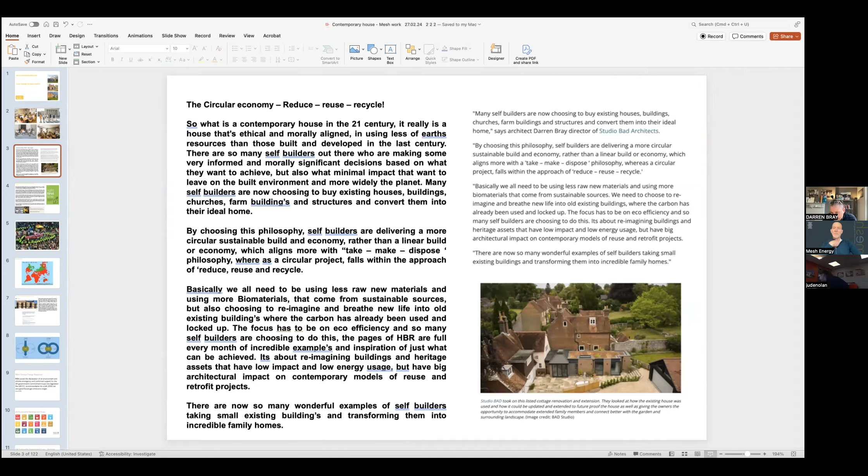And so the article that we wrote for Home Building at the end of... Sorry, Darren, can I just interrupt for 1 second? Do you reckon you could put it on slideshow just underneath, yes sorry, then it'll make it easier for people to see. Marvelous, okay, thanks Darren. Sorry to interrupt. That's all right.

This little article that we wrote for Home Building last year was all about what is a contemporary house in the 21st century. For us, it's that kind of ethical and moral question: how do you align with using less of Earth's resources in the developed world? We talked about the idea that so many self-builders out there are making informed, morally significant decisions based on what they want to achieve.

I was just chatting to Simon about that. Given that so many of the feed-in tariffs and the push for renewables has been removed by government, we feel that private domestic clients are the people really driving the opportunity to continue developing not only really interesting pieces of architecture, but using less materials and sustainable sources. So I think there's still a fantastic opportunity for all of us to be doing some great work.

So we wrote the foreword to Mesh's book, I think probably maybe 4 years ago now. And I think Doug was really quite passionate about writing this little practical guide.

Again, we are academics and teachers, so we take part in teaching at various universities. I teach at Reading University, and we talk a lot about activism with our students. And this young lady, Greta, has been an incredible activist, kind of pushing the idea of how we need to be using less, but still doing what we need to do to bring about interesting opportunities for ourselves.

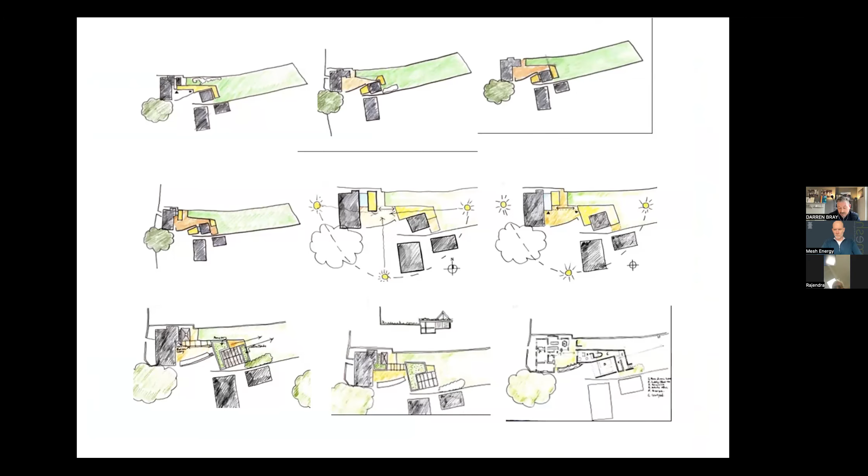This is the rear garden, and they were asking us to look at how we might incorporate an annex and extend their dining space. You can see quite a constrained site, but also very historical. So with every project we look at a whole series of options, and for us it was about looking at sun paths, and how we might reconfigure the garage, then presenting those as a series of options.

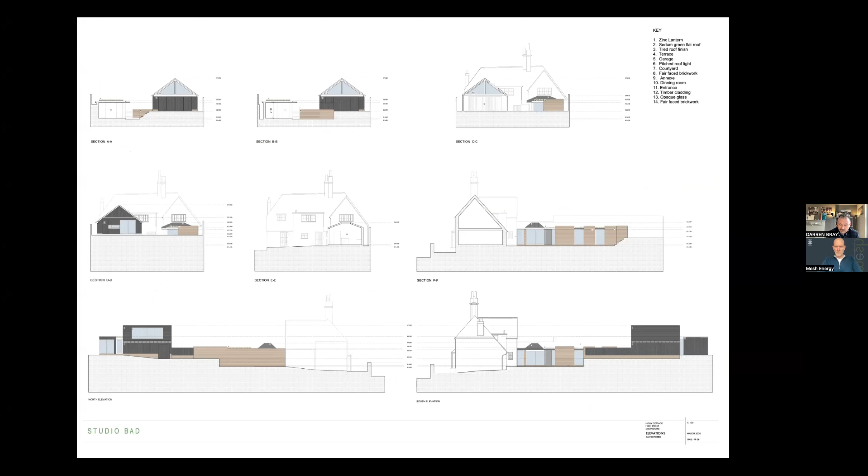So here we've got the existing listed house, and we were pushed by the conservation officer to go quite contemporary with this. We'd already proposed something quite contemporary, and came up with this response, which was a contemporary extension for an annex with a zinc roof, but also building on the local context with the brickwork. We built lots of models and presented that to the local authority, then came up with these visuals, as the conservation officer pushed us to go even more contemporary.

Then it was looking at the existing house and borrowing from that in terms of the brickwork and the detailing. The response was a small little pavilion, which was the joining piece between the old and the new, and then how that sits within the context without damaging it.

This is the family here, and you can see it's quite a tight site, and it was incredibly challenging with some of the neighbours here. But we hope that we've set something that sits reasonably comfortably within the context of Meonstoke.

And then from that we moved on to working with another family who just bought an old farm, a Victorian farm based near Reading, which was a collaboration with John Barclay, a local architect. John's sister bought this property, and we collaborated with John on this.

So again, a very tired existing building, which we've done a complete retrofit on, where we've replaced all the windows, upgraded all the wall insulation, and took the roof off. It's got a ground source heat pump. You can see some really lovely features, and it's got triple glazed windows in now.

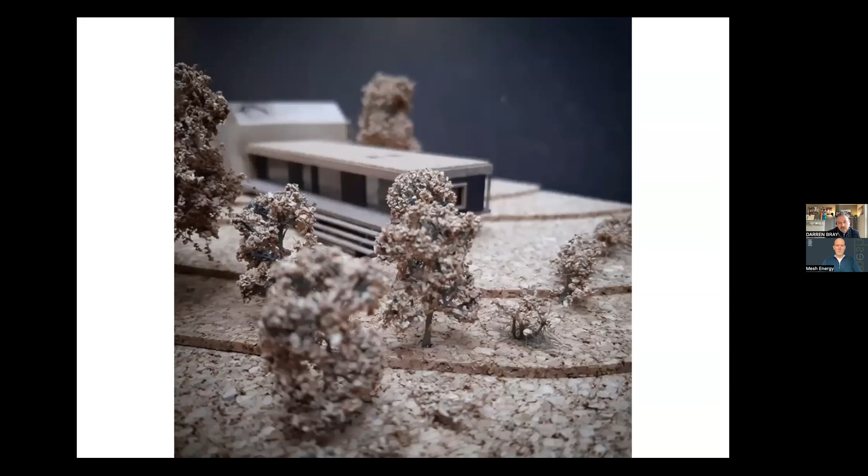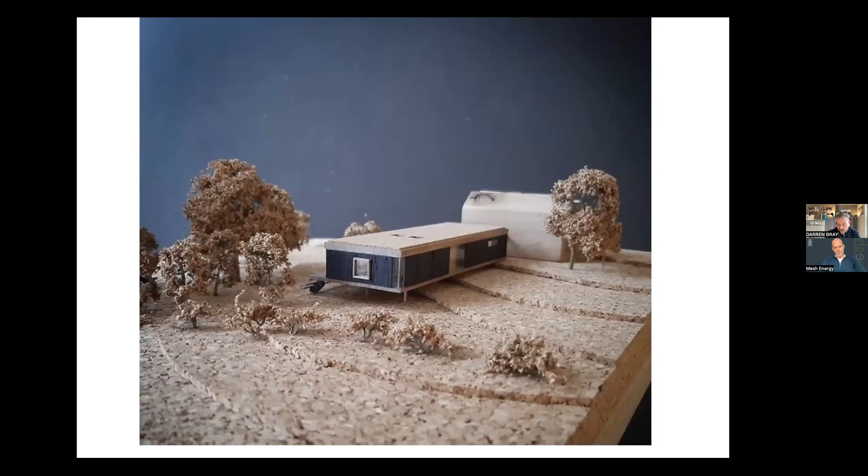This was the existing building we were met with about 4 years ago. The initial idea was we designed a single story response, and we were about to put this in for planning, but the client decided they wanted a 2-story response instead. So we withdrew the application, and worked with John, collaborating on producing this as a 2-story proposal: a timber frame extension to the existing. You can see we've used Internorm triple glazed windows in both the existing and the new build element.

So this as a response is quite something, because with the ground source heat pump and the upgrade in the thermal fabric, there's a huge amount less load on this than there would be normally.

Darren, can I just interrupt again? Tobias is asking a question about this, well, the previous project, in terms of how did you do the upgrade of the wall insulation?

On this one, this effectively was internal insulation. So rather than do anything with the cavities, we've done a complete insulation upgrade internally, and that wraps into the triple glazed Internorm windows, so there's a complete joined adjacency between windows and internal walls—there's no point putting triple glazed windows in if the insulation is within the cavity. It's all aligned with the roof insulation and floor insulation, so effectively we've done a kind of blanket within that internal environment.

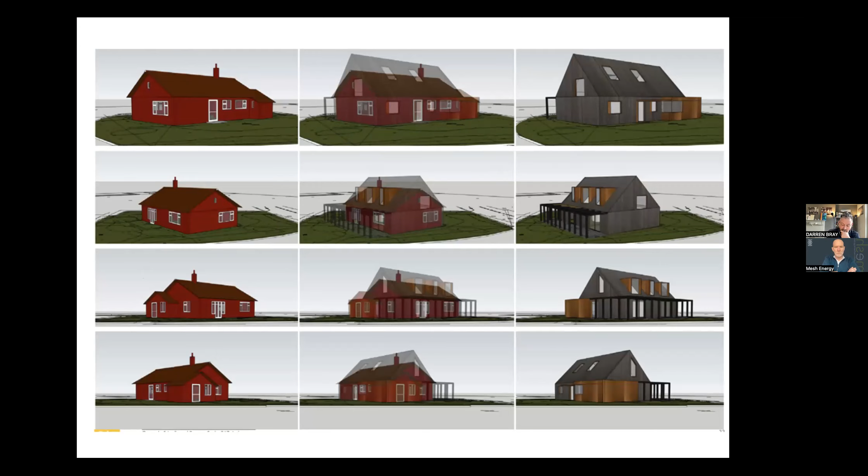You'll see this is the existing property where we modeled what we had, and then it was a case of looking at how we might take the roof off, put a new roof on, but also get rooms in the roof through dormers. So we had to look very carefully at how we might configure dormers in this building.

So we went through a whole process of looking at the existing ground floor footprint—you'll see those were the extensions—and designing external colonnades to cut down on sun. There we're showing the roof extension as to what we were increasing on the height, and then the dormers. All the dormers are then angled so that they turn away from the neighbours.

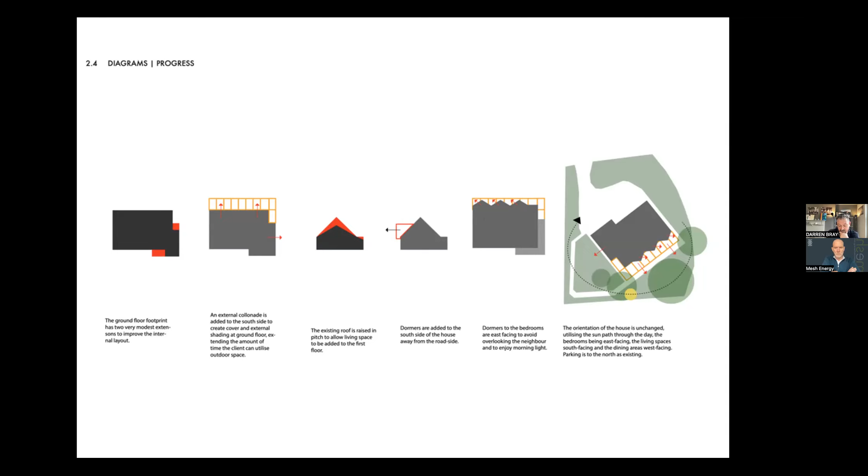At the same time, this was again doing a complete thermal upgrade and trying to create something of architectural merit that the planners would buy into. So effectively we reconfigured the ground floor and put a new roof on to get bedrooms in the roof—here are the dormers that are cut into the new roof.

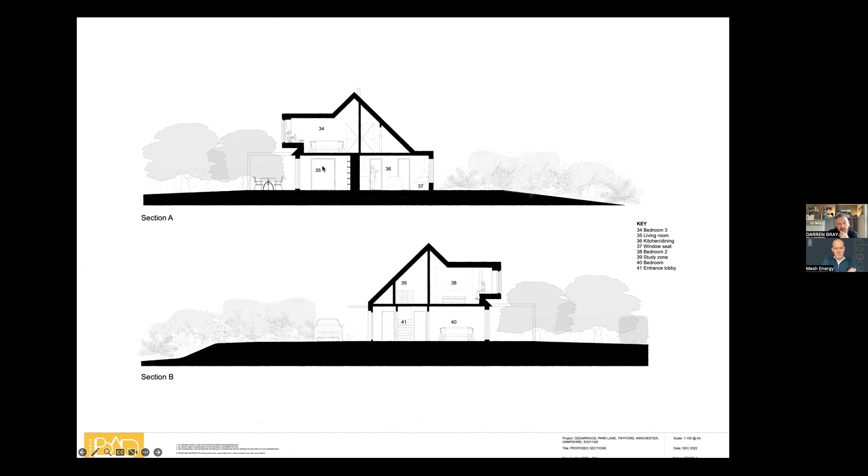The idea was to completely reclad the outside of this building, keeping the existing timber frame, upgrading all of the existing insulation in the walls—we added mineral wool to the walls. We also upgraded the floor, put a new roof on, and there were air source heat pumps that we got planning for as well.

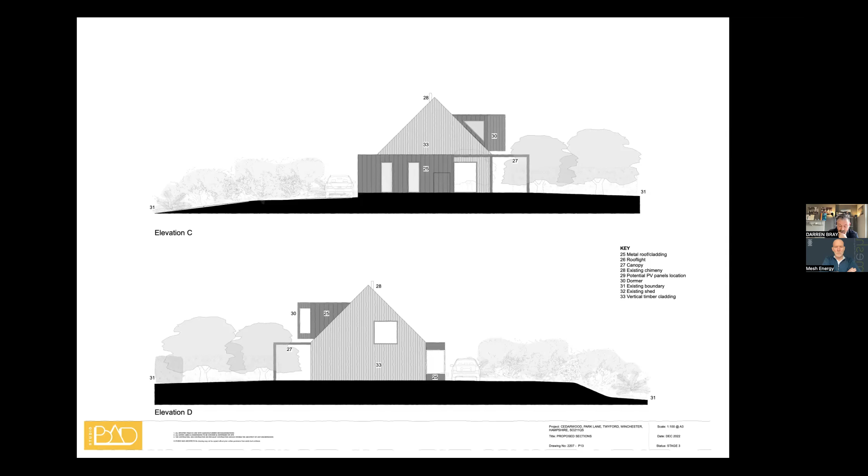When you say—did you say plural, air source heat pumps?

So we've got planning for two. We've put one in, and at the moment I'm not quite sure what the feedback is, because the clients have moved to Madrid and they're renting this house for the time being, so it'll be interesting to find out how it's performing.

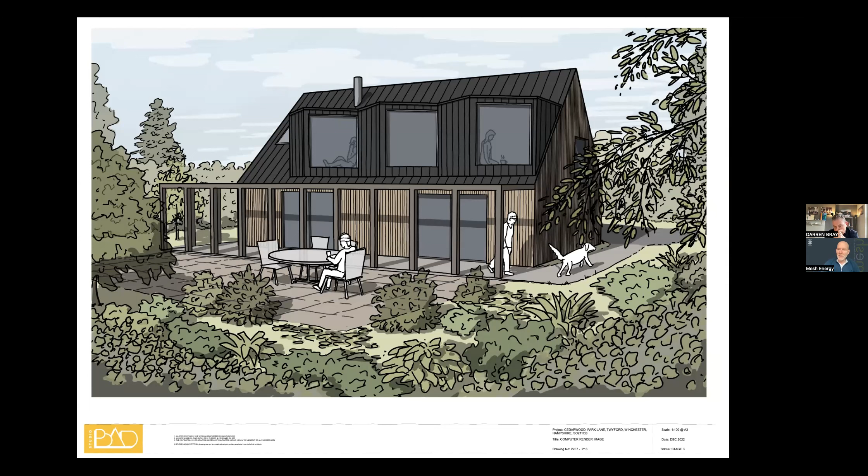Is there any post-occupancy evaluation ability with this one? It'll be interesting to ask the question. I think the greatest challenge for architects is doing projects like this, and then asking clients to buy into that, whether we've got a fee to do it or not, but still have to monitor it. It's a real challenge for us as architects at the moment to get that feedback, but it's incredibly important.

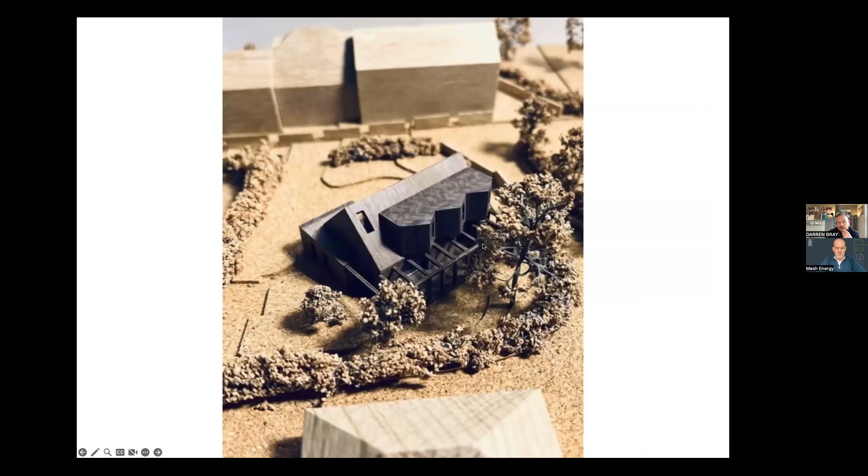Quite different to what it looked like before? Very different to what it looked like before, yeah.

This is a project that we have on site at the moment, and this is something that we've been working with Mesh on for probably about the last 18 months to 2 years.

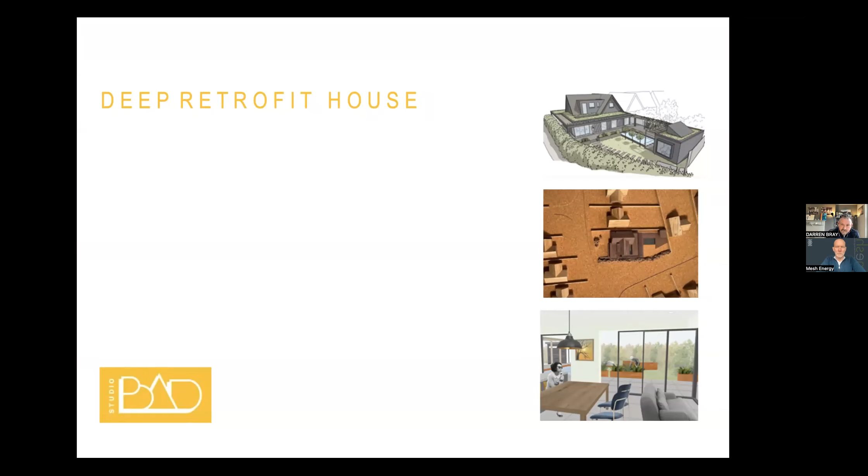This is a house in Brockenhurst, where the clients bought this about 2 years ago, and it had these interesting little appendages at the back that had been added over a number of years. The client's challenge to us was that they wanted a complete thermal upgrade of the existing property, but they wanted an extension that engaged with the garden, because they wanted a new kitchen - they're very passionate about their cooking and entertaining.

So we went through a process of looking at how we might thermally upgrade this building, and Mesh have been fantastic in doing their own feasibility work, which has been incredibly important to feed back to the client.

As an example, this is some of the work that Mesh have been undertaking - looking at the existing roof and how that sits with the new roof, existing walls with the new walls, and looking at all the options. What's fantastic about this is that it looks at what the cost of the materials are, what the cost of fuel is, and you can see there's a column that looks at the payback.

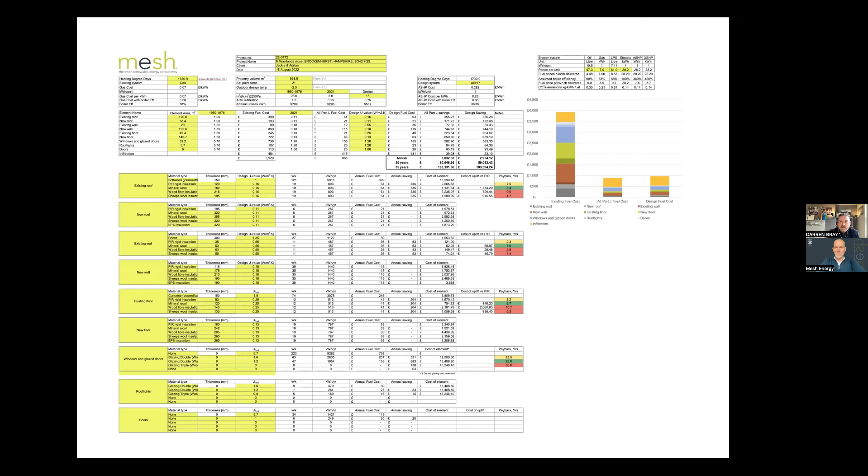Not only that, Mesh suggested that we did a permeability test before we actually started construction of this. So it's the first time that we've undertaken a test on an existing building before doing any work, and that's been great to feed into what we're doing as a team.

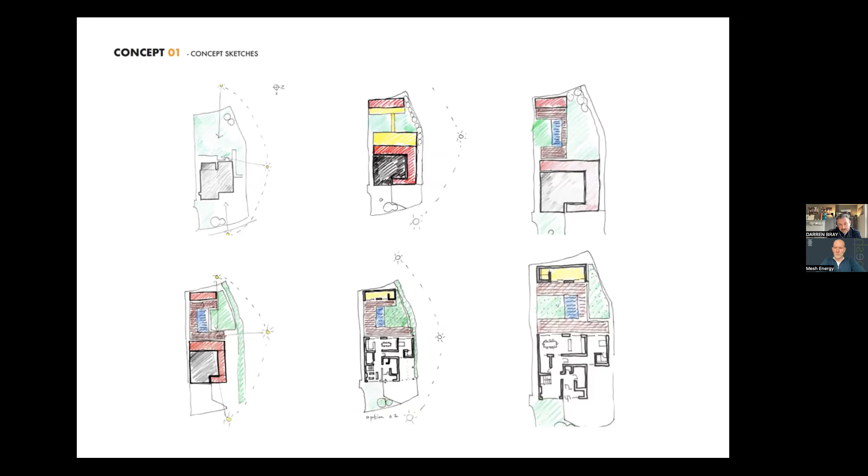So for example, we did a feasibility study in line with Mesh as we were looking at design options and looking at the extension. So this is the existing house, and then we've looked at options to extend at the back with a new kitchen, dining, living space.

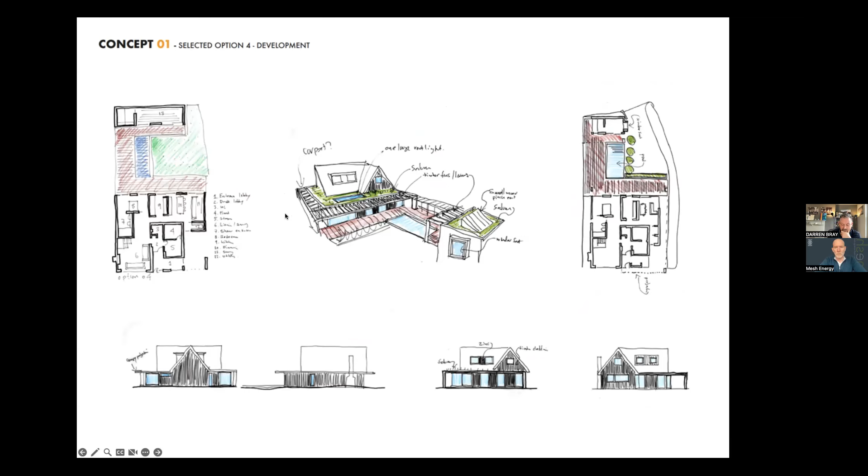Lots of ideas about how we might build in shading once the extension's in place, but also looking at how we might upgrade the existing building. We did a lot of SketchUp modeling to look at overheating and how we might negate that. So you'll see here, this is the proposal for the extension, and then we've got these sunshades at the back.

We're also looking at recladding and insulating the existing building, putting in triple glazed windows in the existing building, just like the Victorian farmhouse. So really this is the key extension, which is creating this relationship to the garden.

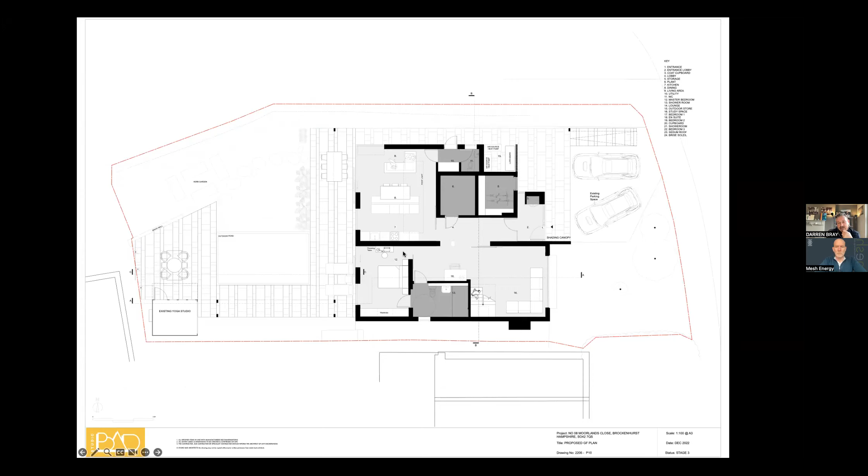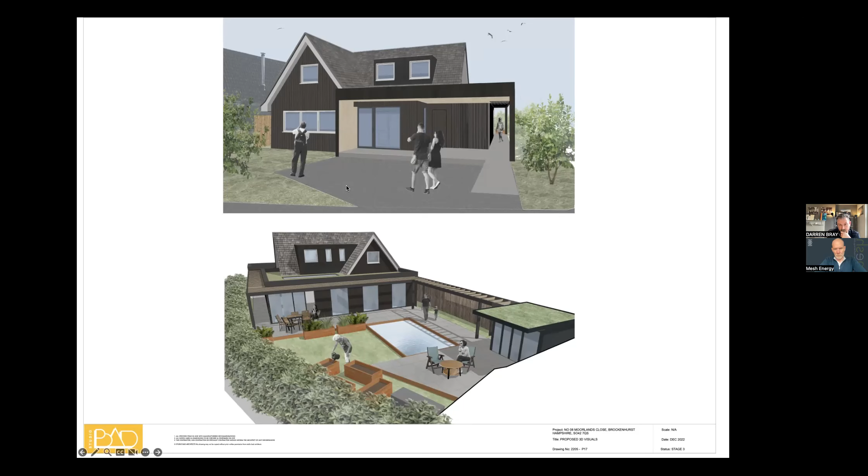This is the rear space where we've got our little extension, tying into some of the things the client wants to do in the rear. We've got a new entrance canopy as well that ties everything together. Again, we're building lots of models to convince the local parish council, which is always a bit of a challenge.

This one was an easy one. It was the first time the parish council had ever seen an architectural model brought to a meeting, which got unanimous voting on our side.

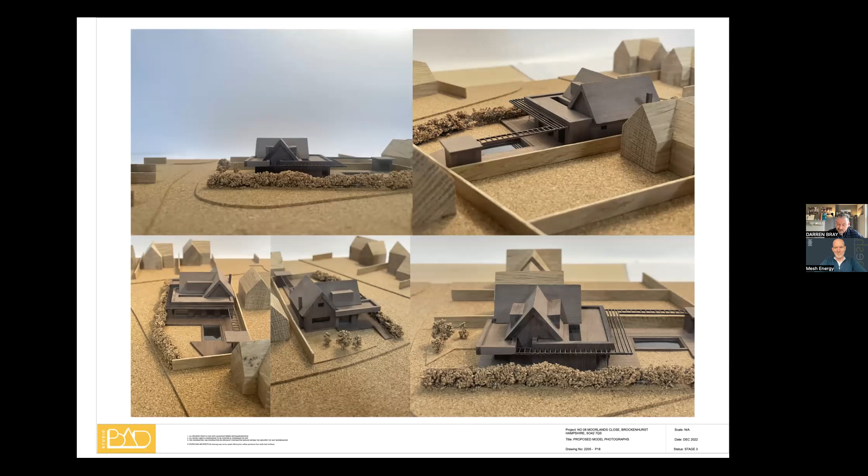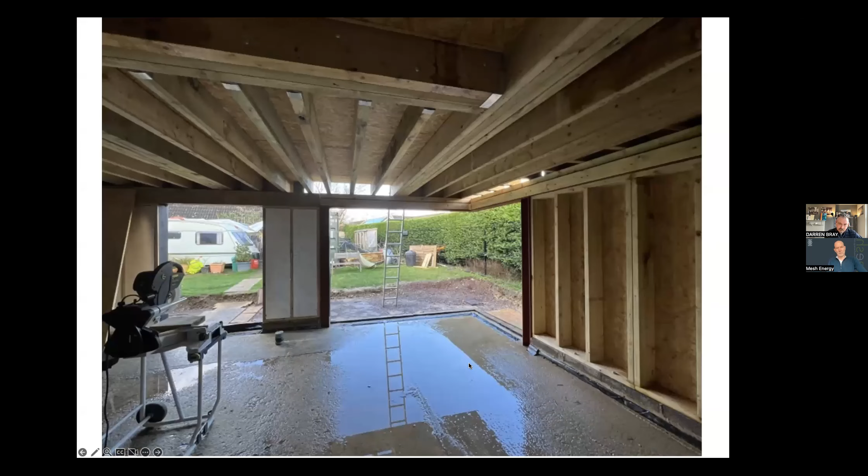So this is us currently on site, and this image is from the front door. It was all about looking through the existing house to get these views of the garden. This image is from the dining space, again looking all the way through into the new living kitchen dining space. And this is the key view out.

So again, we're using Internorm windows. That's Paul the builder from Task, a local builder based in Christchurch, who's doing a fantastic job on site.

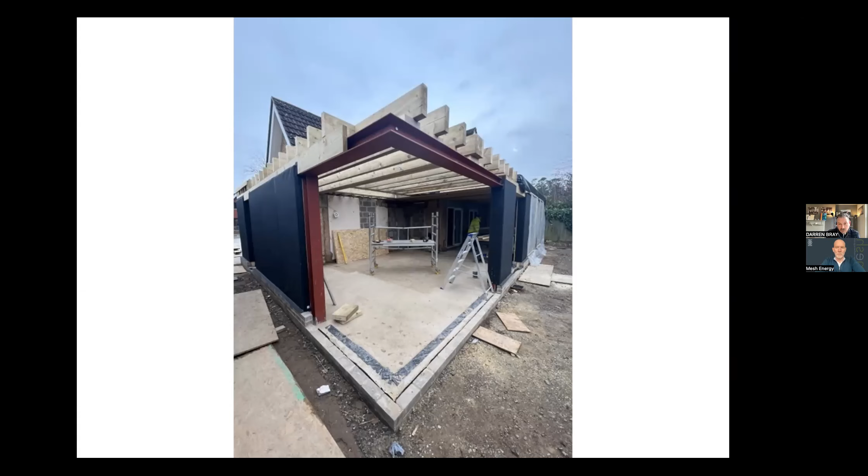Do you help find the builders, or is that down to the client? Yes, we've had to, because it's become more and more challenging with tender and build costs, and we negotiated with Paul on this. There are certain things Paul's doing and certain things the client's doing. It's the only way we can deliver these projects at the moment.

So this is the extension from the back, and we're going to be overcladding all of the existing cladding, upgrading the insulation. So again, we've got Internorm windows going into the project.

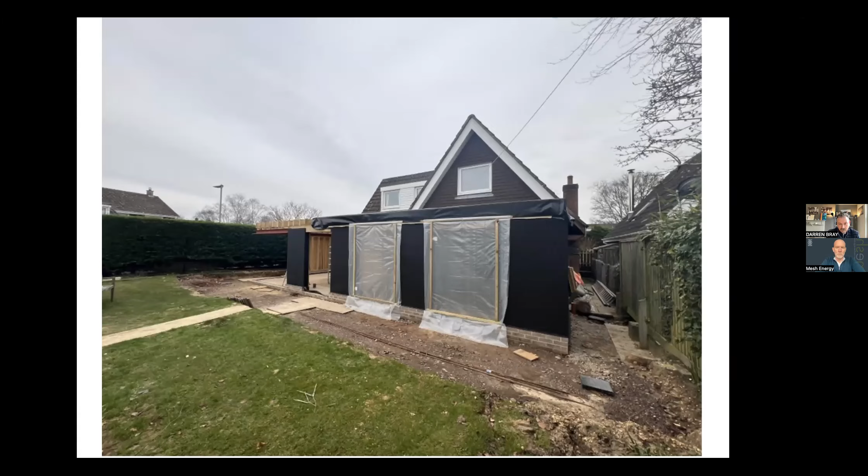Just on that, I didn't ask you to come on and plug Mesh, but it's great that you've mentioned us. When it comes to the work Mesh did with you, obviously the clients have certain ideas of how they want to use the house, the connection to the garden, etc. When it comes to the thermal upgrade work, the insulation and cladding, and addressing overheating, and even getting the client to pay for the feasibility study, was that something they were already interested in, or was that you leading the conversation?

I think they brought that question to the first meeting they had with us. They came through the RIBA. It's always interesting when a client comes through the RIBA client advisory service, because they've clearly done their research and gone to the RIBA saying we need to find an architect. So generally those clients are coming with quite a lot of knowledge themselves, having done a lot of research, and they may well have been to some of the trade shows out there.

So it was a question they asked us at the first meeting - how do we go about looking at a strategy for the whole project? And we said, well, ideally we go and appoint Mesh to do a feasibility study alongside us.

What was great was that you guys were doing your work while we were doing the design work. So it wasn't that unfortunate situation where we've done a load of work, maybe even gone in for planning, and then come to you asking how do we look at some of these things. It was pretty much at the same time we were starting our work, so it was great to feed in, and the fact that we did the air test at the same time on the existing structure meant we knew what we were doing. It just dovetailed really quite well.

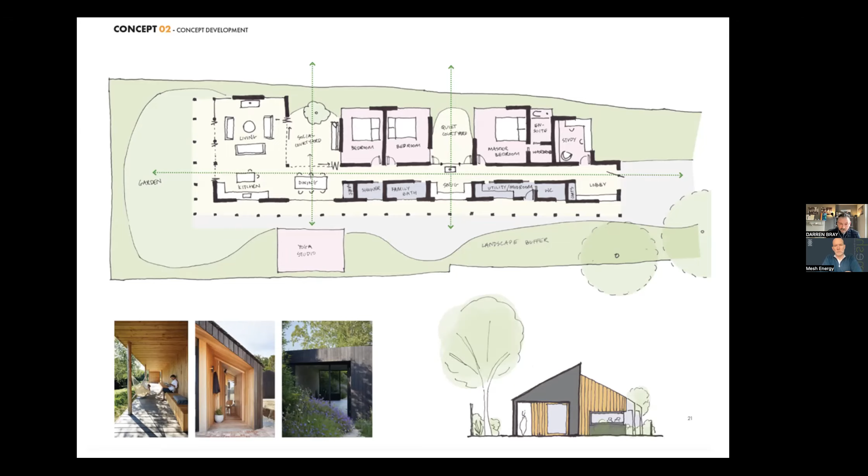So we've taken the existing context and designed a house that works in the existing skinny plot, but has a series of mini courtyards, so that those courtyards spill out and bring the natural landscape into the house. It gives us an opportunity to open out onto those courtyards and use them for natural shading and ventilation.

Again, we did lots of SketchUp modeling to look at what the options were on this site, and then we produced a whole series of illustrations.

So in reality, what we're trying to do is remove the existing building that's past its sell-by date and produce something very similar. The idea is that we're cladding the roof and the walls in all the same timber cladding, and these little courtyards form breakout spaces between living, dining, kitchen and bedrooms.

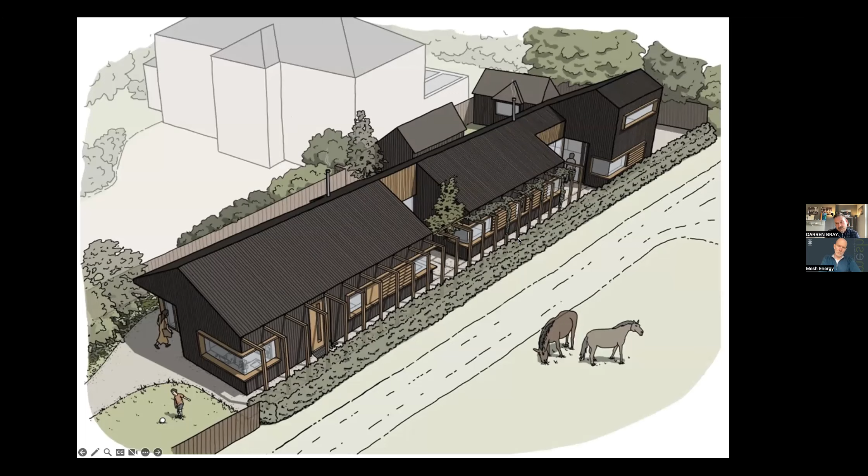It's been really quite challenging through planning. In fact, we haven't quite got there yet. We're about to go to planning committee in about 4 weeks' time. We've got major backing from the planning officer and conservation officer, but everybody else in the vicinity has been quite challenging. But that's the nature of the project, really.

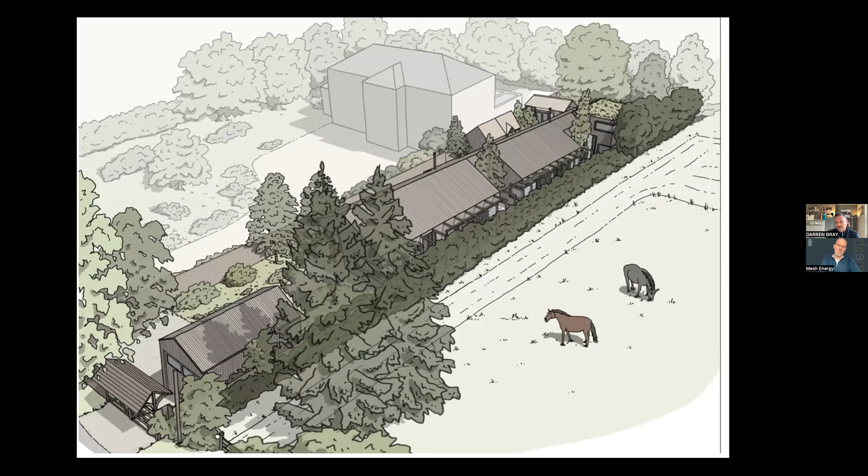So you can see the context - that's how our building sits on this long skinny plot, with the existing properties around. Quite interesting, because what we've been doing is trying to sell the idea that this is very contextual. We've built lots of concept models just to show the client. The idea is that it's drawing from the natural agricultural aesthetic, which the planners and conservation officer have bought into.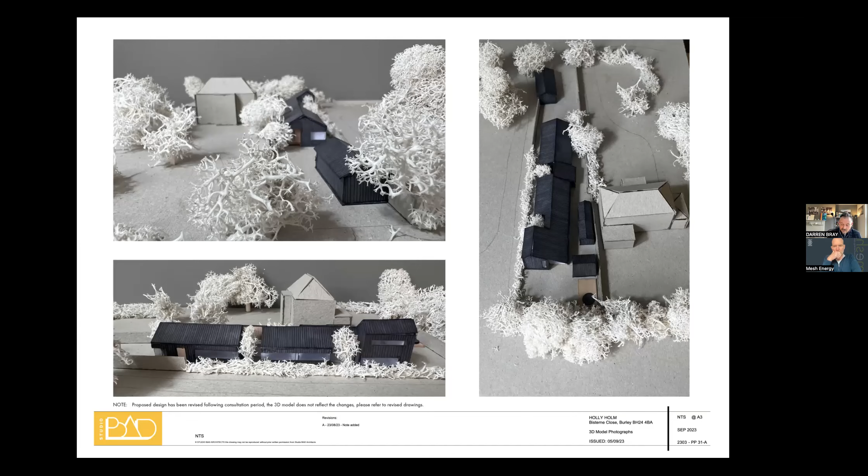But as far as some of the neighbours, they expect this to look very domestic and very traditional - they're fearful that it's going to look that way. Whereas our view is this is what we'd typically describe as contemporary vernacular - drawing from the vernacular, but with a contemporary twist to it.

We've been working with a cross-laminated timber company, even at planning stage, to develop a system where it'll be cross-lam walls, cross-lam floor and roof. The idea is that it will float on screw piles. Again, it's heavily constrained in terms of trees and planting, so the idea is there won't be any trench concrete foundations, there won't be any concrete slab - it'll be a structure that sits above the landscape.

Darren, do you mind if I just bring John in? He's got a question. John, did you want to come off mute? Right, anyways, can you hear me?

Yeah, very good. My question really, Dan, is do you have any costings of these upgrades? As it would seem that such upgrading would almost be the same cost as the new build, especially with the VAT advantage, where you don't pay the VAT.

So we have these conversations, which I'm sure everybody on this call has with their clients, about VAT and upgrades. For example, the project near Reading, the Victorian farmhouse - the client had done their research, so they deliberately bought that property knowing it had been empty for a period of time. If a property is empty for 2 or 3 years, then providing you have proof with the local authority in terms of whether anybody's paid any council tax or not, you can rate the VAT down to 5%.

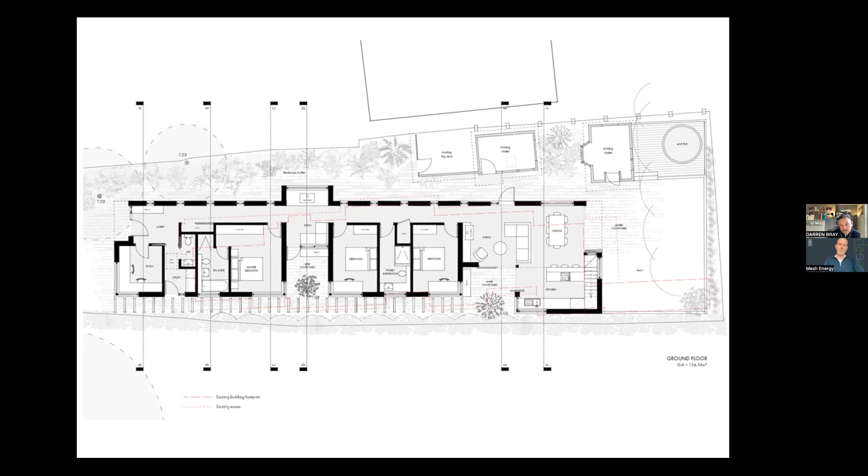On this one, we don't have a current sort of costed budget. We've gone out and got an approximate cost on the cross-laminated timber. This is about the third or fourth iteration in terms of planning, which we're hoping we'll get approval on in the next month.

The other last quick project I was going to briefly talk about is a project that we're just about to put in for planning. Again, it sort of sits comfortably with our philosophy about reuse and reimagining. This is an old pottery in the centre of Whitchurch, where a client has approached us to attempt to get planning for a new house right in the centre of Whitchurch. But again, for us, it's really important to reuse, reimagine, and try and draw from what's already here.

So you'll see the current aesthetic. This is the external wall that greets you, which has got a beautiful mix of flint and brickwork, and even sort of cut-ins for where Penny used her studio here to get light into her pottery studio. What we've been doing is trying to draw from that into what we propose.

We had a design review on Friday here in the studio, and we had somebody from the National Trust, who's a surveyor, as part of our design review panel. He talked about a phrase called bungaroosh, which is apparently a real term for this type of construction, which is kind of added, and it's a sort of natural aesthetic that appears in certain parts of the South Downs National Park. That was all new to us, but it's interesting because what we're trying to do is draw from what's here.

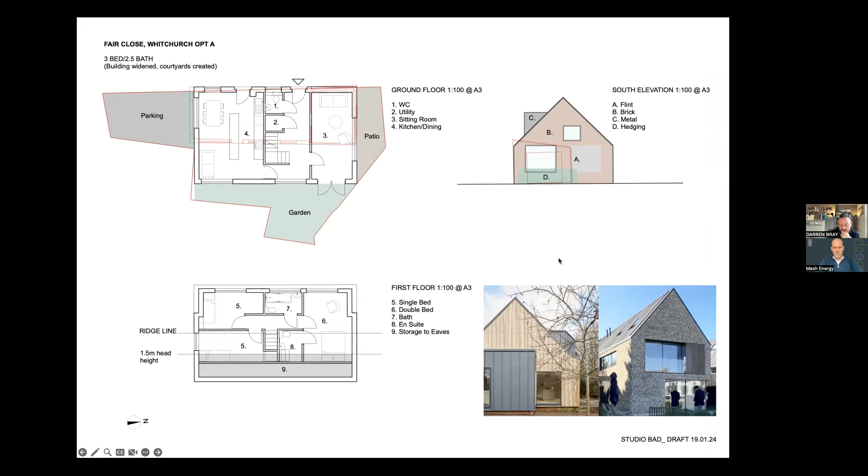So what we've been looking at is replacing the pottery studio with a new home. Examples of things we've done previously, but also really good contemporary examples of how you might produce something which is of a traditional form. And that idea of taking something that might be a ruin and then adding something to it. So it's how you can use what's there to your advantage and then propose something that's much more contemporary.

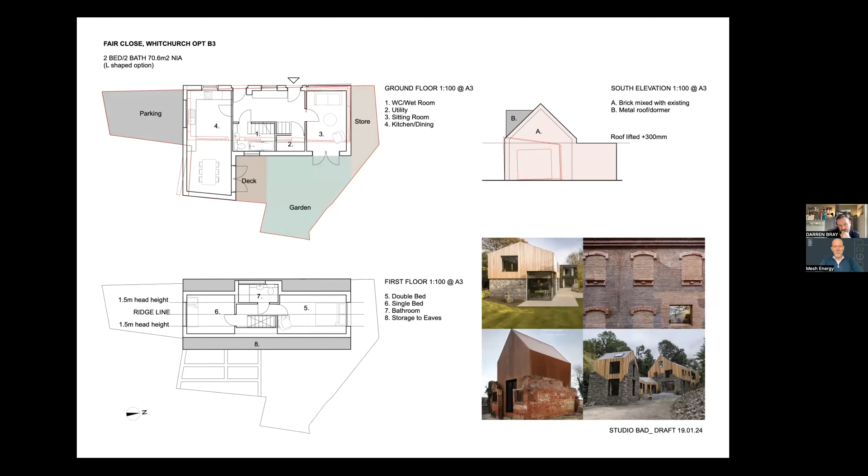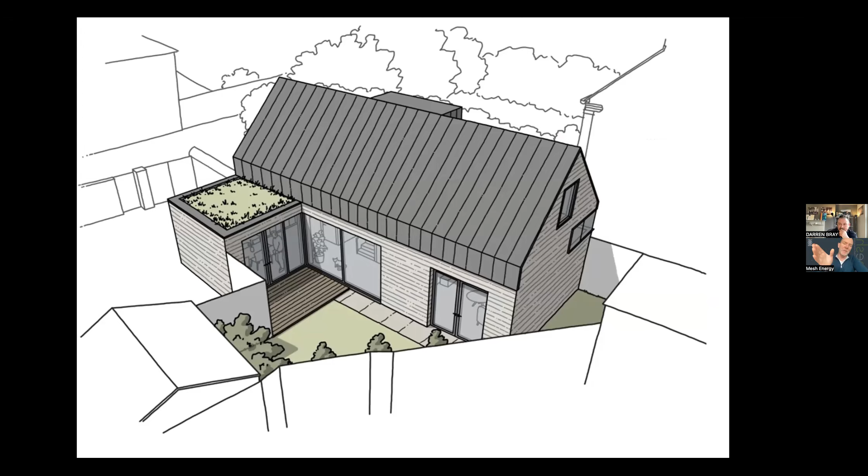What was good last week is when David was speaking, he was talking about how he was using leftover materials to put in nesting areas for birds and insects - little insect houses, it was quite cool, just trying to use as much leftover material as possible within the design. It was cool.

And that's exactly what we're trying to do here. So from that photograph I showed at the start, where you've got the existing brickwork and the openings, that's effectively what we're trying to do - take what's there and add in your contemporary addition, but produce something that is thermally aligned with current building regs. And I guess that's really our passion - whether it's a house or a church, it's that same aesthetic.

So I think that's my last slide. It's a bit of a quick run through, because I know you talked about 30 to 35 minutes. We've had questions on the hoof as well, hopefully you're okay with that. I didn't ask you whether you wanted to take questions during or after, so apologies for that.

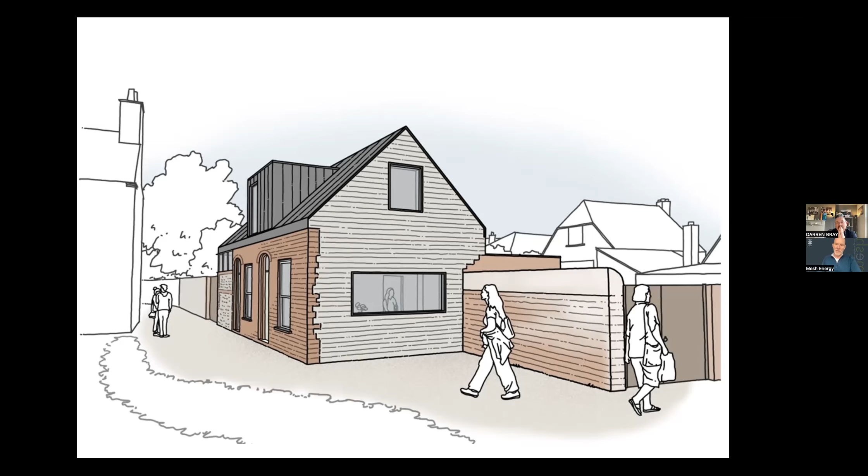It's good to see the different types of contemporary houses that we can all live in and can look to design as well - it's a really interesting presentation. Thank you, and also they weren't all grand design houses, they're all very attainable. The farmhouse with the extra building on the side - people will be fortunate and lucky to live in a house like that. But it's good to see the different breadth, and the skinny site, as you called it.

In fact, not that it's about me, but I found a plot in a village close to Exeter, and it was very, very similar to that plot. My wife said, I cannot live in such a thin plot as that. It was interesting to see how you met that challenge.

So I'm just seeing what Jill was writing - were some of the properties built to passive house standards, or did you include elements of PH, like triple glazing etc.? None of them are built to passive house standards. It's always a bit of a challenge to do that on existing buildings, but not totally impossible.

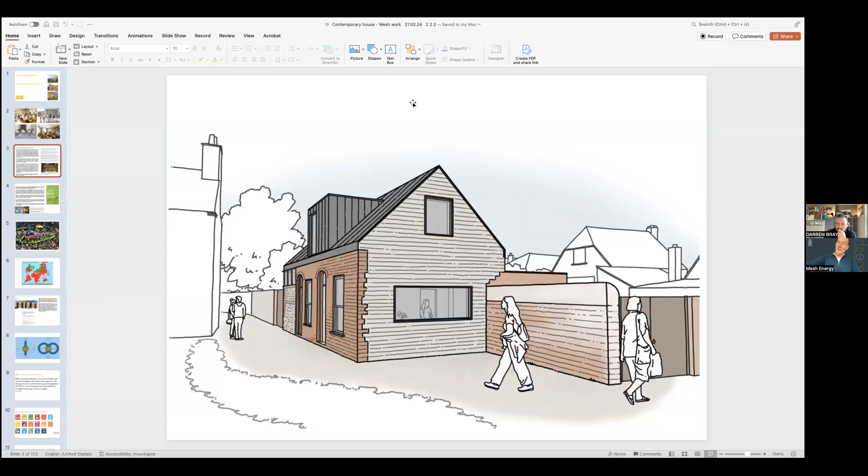Does anyone else have any more questions? It's been a really good session.

Matthew, can you come off mute and tell us your name first, and then ask your question? Hi, it's Matthew, I'm an architect. I work on similar kinds of projects where you've got bits of existing buildings and tight budgets often. Just wondering if you find it difficult to propose fees for this kind of project, Darren?

The most difficult question scenario. Yeah, I mean, it's a major challenge on any project, quite frankly, whether it's this type of project, whether it's a church project, whether it's a developer project.

I think what we're trying to do on every project where we're quoting fees is be very deliberate about what the deliverables are. We'll be quite upfront about what we're delivering on the planning application. And then I guess your question is really around the technical element - so we'll be very upfront about how many hours, what drawings we're doing, and what coordination and meetings we might be doing if Mesh are on board.

I think it's just a challenge, and clients have got less money in their pockets to spend on the physical stuff. They've also got less money in their pockets to spend on consultants. So we've had to just be really upfront about, okay, if that's your budget on the fees, then these are the things we can do.